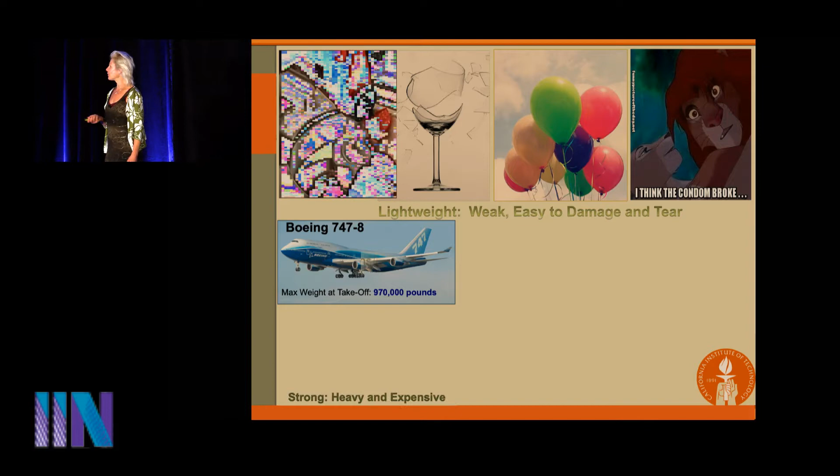So in contrast, let's look at the materials we know to trust. So some of us are very intimately familiar with these. Of course, the airplanes are made out of very tough, strong materials. Well, the Boeing 747 weighs nearly 1 million pounds. And the tremendous expenditures in the airline industry come from having to propel a 1 million-pound machine through the air. So if we do a very back-of-the-envelope calculation, my ticket to get here should have been $30,000. So thank you very much for reimbursing me.

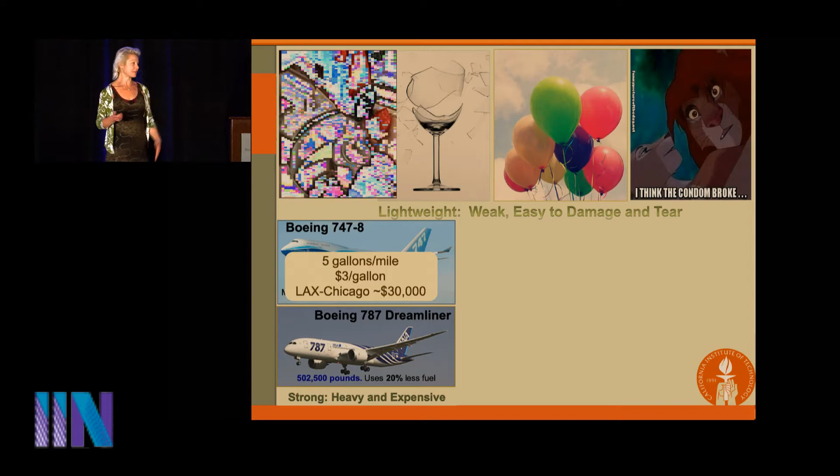Right, so of course the Dreamliner is already fixing these problems by reducing the weight. These are examples of materials that are very strong and tough, and because of that, they're heavy and expensive. Now, another example of this, of course, is the solar panel installation. We have a lot of these in California, certainly a lot of these in Europe. And these are specialized materials, so if this guy or any of these objects slide off the roof, this is going to be bad news for everyone. So another example of materials that are too heavy by the virtue of their functionality.

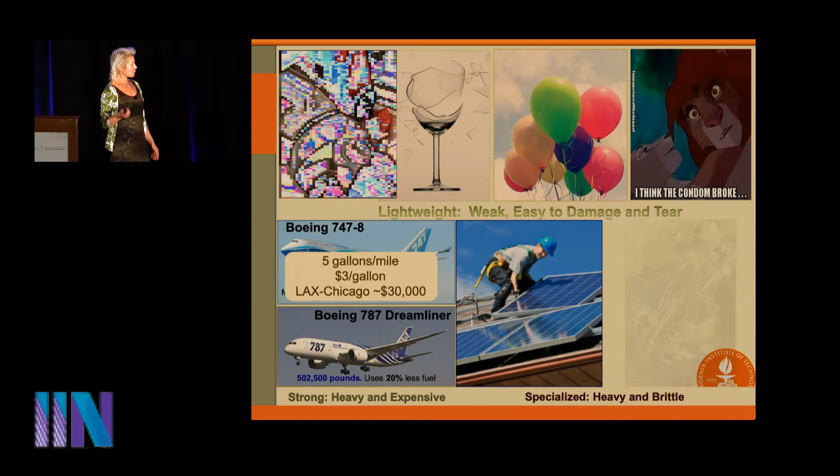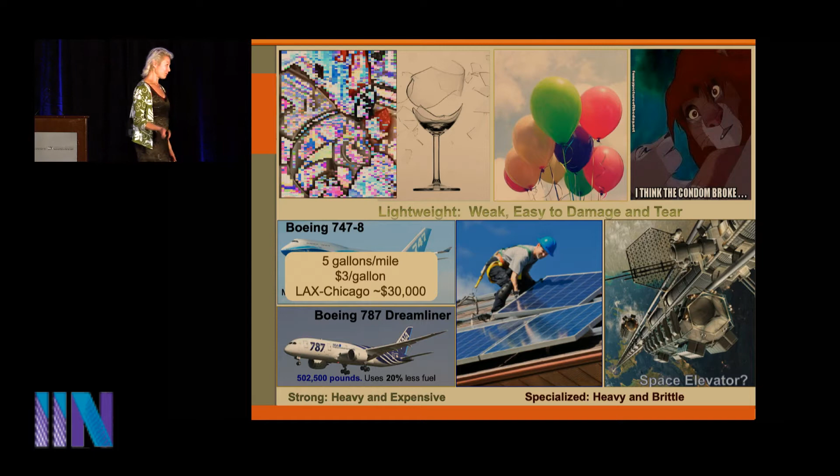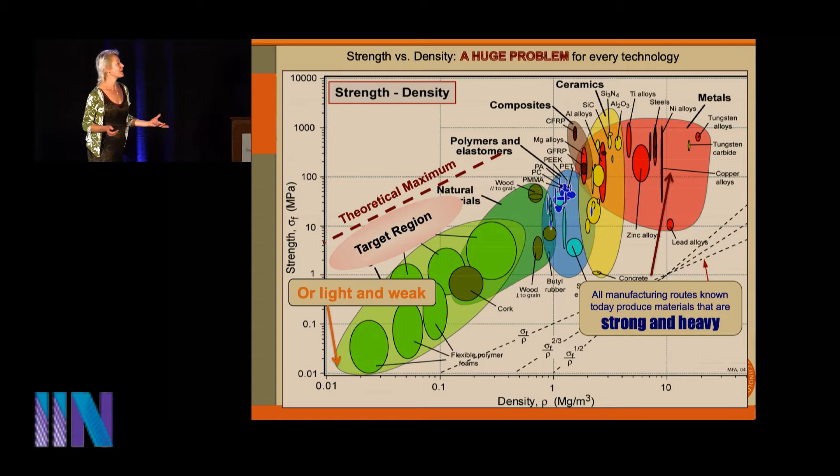So even a small increment within the space already represents a substantial change. So how do we do this? How do we hit this white target region if everything we know how to make today is already plotted here? So the way we do it is by introducing the concept of architecture into material design.

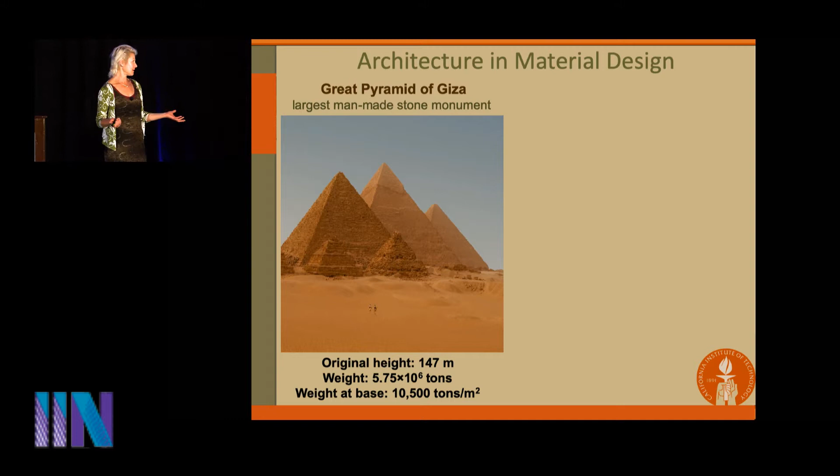So if you look at the Great Pyramid of Giza, this is the largest man-made monument. So it stands 150 meters tall and it weighs nearly 6 million tons. Now, in contrast to the Eiffel Tower, which stands twice as tall, and it uses 3 orders of magnitude less materials, so 1,000 times less.

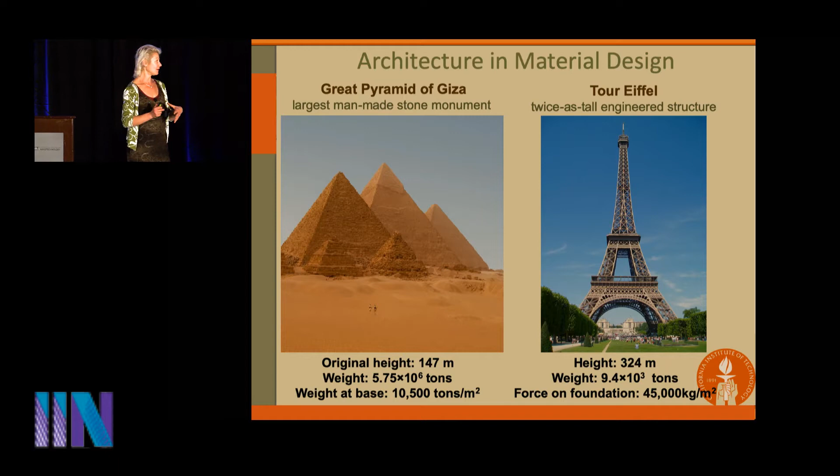So it's exceptionally lightweight. In fact, if I were to hold one of these in one hand and a feather in the other, and then to release them at the same time, the feather would fall down faster. These are very, very lightweight. Now, what we're after is not just the lightweight, but the simultaneous attainment of the lightweight and the strength. And for that, you have to go down to the nanoscale.

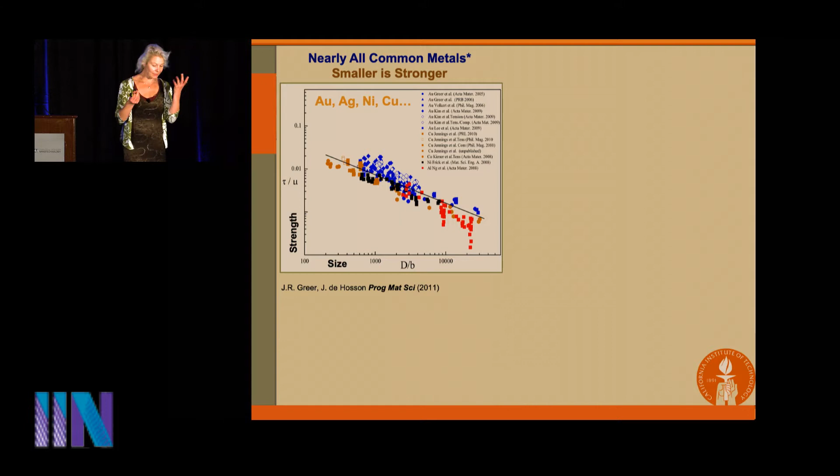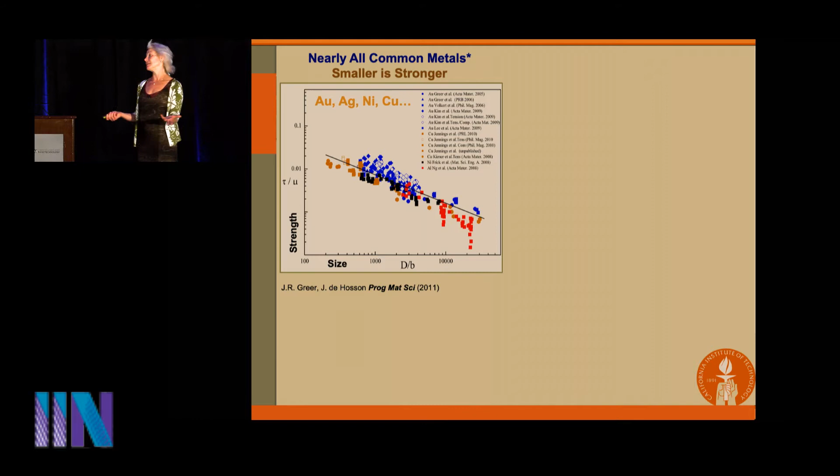What that means is that if you take a gold earring, we know them to be very malleable, and you reduce their dimensions to about 200 nanometers or so, the gold becomes as strong as steel. So smaller in this case is stronger. Now, take exactly the same metals and deposit them using different techniques, for example, sputtering or PECVD or all the nano deposition techniques that you are all familiar with. And all of a sudden, this effect is reversed. And now, smaller becomes weaker. This is a more modest size effect. It's not a log-log plot, but nevertheless, the smaller dimensions now give rise to weaker type materials.

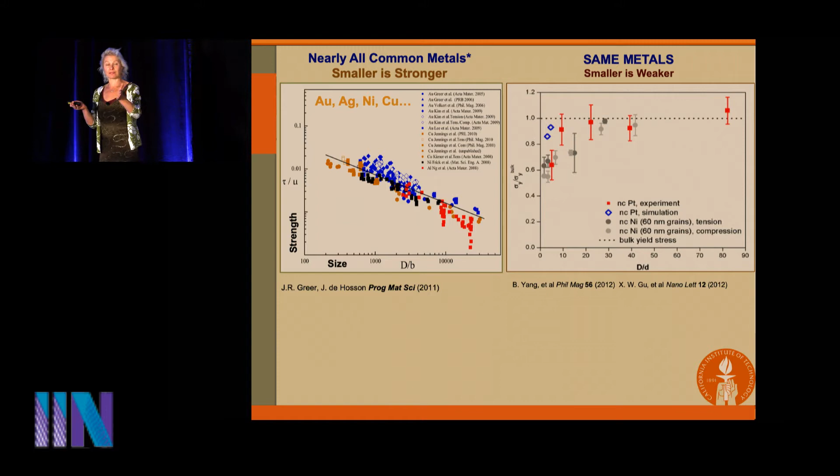So now you're starting to think, oh, it's the same metals. But now we have this tunability in strength by the virtue of size reduction in a different atomic level microstructure. Now, the size effect is even more powerful than that. If you look at a glass, so this is a glass rod. It's about 150 nanometers in diameter, and we're going to pull at it. Now, of course, we all know that's not possible. Nobody at room temperature is able to just pull on a glass rod and get anything useful out of this.

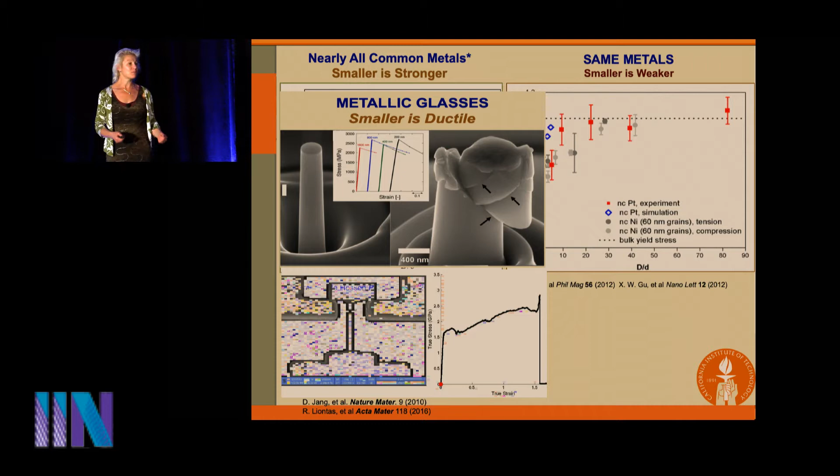So if you look at the stress strain data that we're collecting simultaneously, and especially if you focus on this region, you will see the formation of a neck prior to failure and an extendability of about 100%. So at the nanoscale, it turns out at room temperature, you can actually pull on a glass rod and it thinks that it's behaving like a metal.

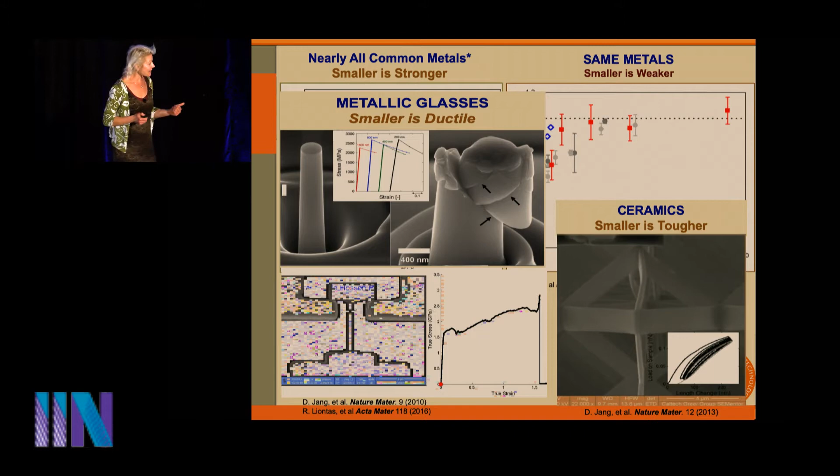Here's the last example. If you look at a ceramic nano architecture, this is just a single unit cell. So this is made out of titanium nitride, very, very brittle ceramic, and we're pushing on just a single unit cell. What you see is that these beams are deflecting, and they're deflecting so much so that the tensile stresses that are generated here exceed 1.5, 1.7 GPa. No ceramic should stay intact at 1.7 GPa of tensile stress. But this guy, not only is he staying intact, but he's doing this over multiple cycles.

So the takeaway message here is this: sometimes materials get stronger, sometimes they get weaker, sometimes you can suppress brittle failure, but all of these effects emerge only at the nanoscale. And so the question is, can we somehow harness these beneficial nano-size-induced phenomena and proliferate them onto the larger scales? And that's where the three-dimensional nano-architecting comes into play.

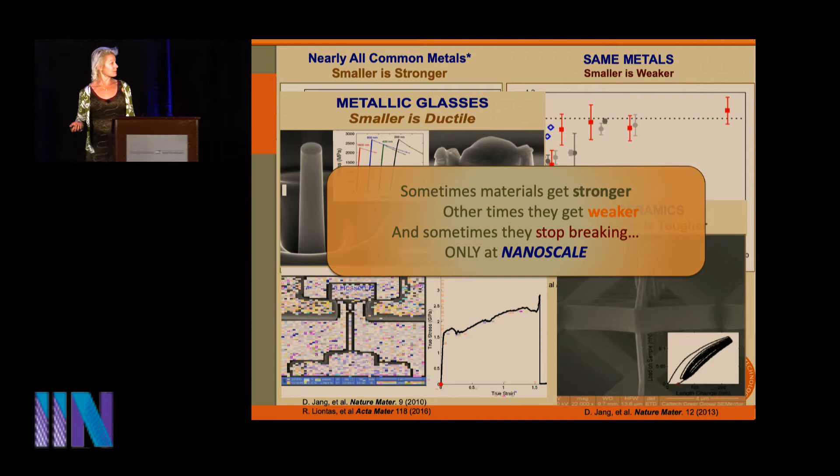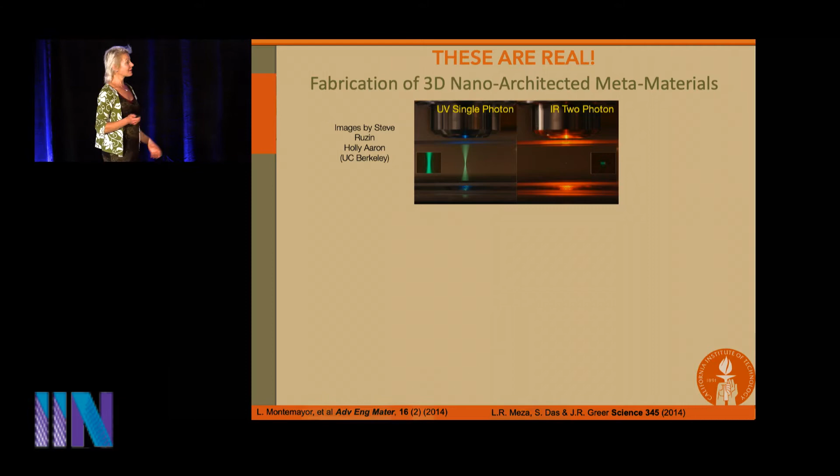So just a few words on how we create these very intricate geometries. Instead of using UV single photon lithography, which is a very typical process for two-dimensional lithography, two-dimensional architectures, we're using a process called two-photon lithography. And that allows us to concentrate all the light and all the exposure within the photosensitive resin in a single voxel. So it's the constructive interference of exactly two photons that gives rise to the sufficient amount of power to cross-link your polymer.

Now, as this voxel is rastered in three-dimensional space within the resin, it creates a pattern that we desire. There's no mask required. We're not limited to periodicity. I can write a nano version of each one of you, so nano chat is going to have a different meaning after we do this process. So we can create, I guess it's chat nano, sorry. So we create whatever scaffold we desire without using a mask.

And then what we end up with is this scaffold, but that's made out entirely of cross-linked acrylic resin. By the end of this talk, you'll see that that's not the case, but that's what most people do that use this technique. Now, we're not going to go build airplanes or anything useful out of these. So what we do after that is we often coat these scaffolds with the material we actually are interested in.

Now, how many of you are familiar with ALD, atomic layer deposition? Quite a few. So in the ALD community, they say, we can deposit anything you want for you as long as it's alumina. So here's some alumina. This is an example of depositing alumina. It doesn't have to be alumina. We certainly have used many other techniques, but this is how we started.

And then the form factors in which we typically make our samples are typically cubes, and so that allows us to expose 2 out of the 6 faces and then to etch out the scaffold that was so painstakingly written. So in the end, we end up with these hollow replicas of what we had originally designed, where the only dimension of a solid is that wall thickness of the ALD deposited alumina, for example.

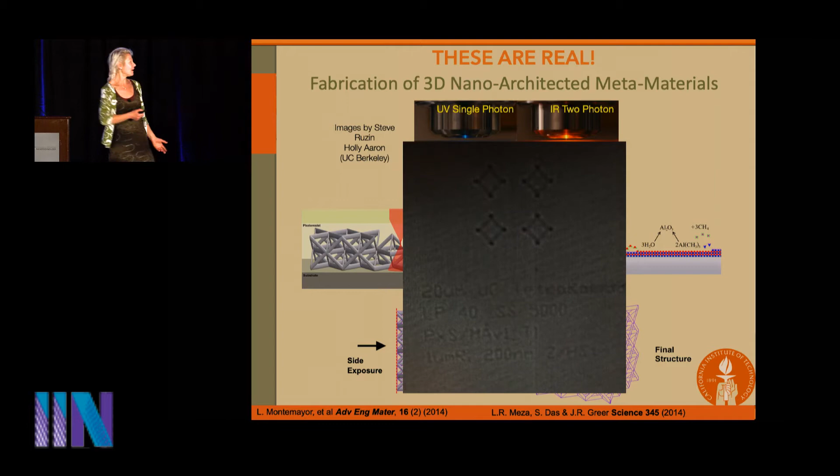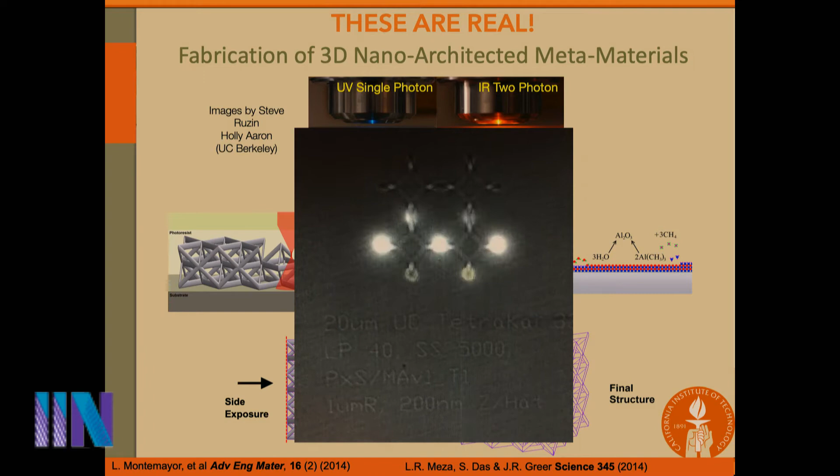So here's a movie in real time that shows you, is there a Nanoscribe here in the IIN? Do you have an instrument that has this? So maybe some of you are familiar with this instrument. So this is what it looks like in real time, this two-photon lithography process. You can see it resolving the architecture. It's not very slow, but it's also not very fast. So you can think of this in real time.

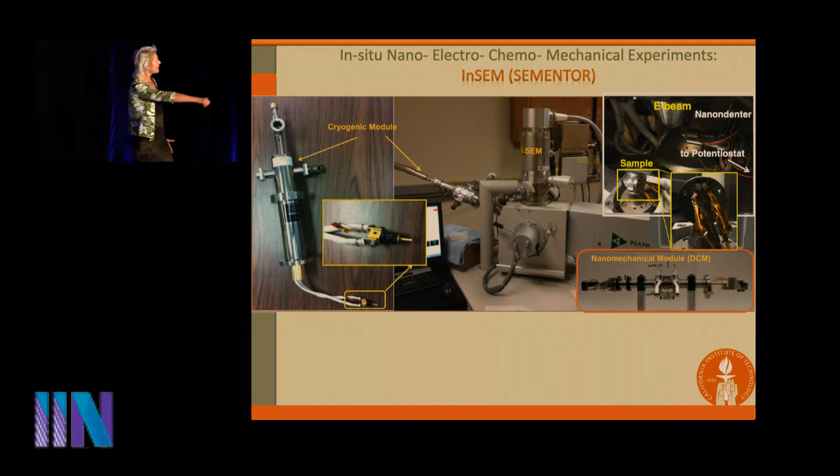Now, everything we make is pretty small, so you can't really resolve the features just by optical microscopy. So we built a special instrument that allows us to really perturb these structures and to study their behavior. So without all the bells and whistles, this would be just an SEM chamber. Of course, everyone's familiar with that. We also have the capability to do electrochemical measurements, and I'll share with you some of the results in that realm. Also a nanomechanical module. We're a very nanomechanically oriented lab. And then also a cryogenic module, which allows us to span the range of temperatures and study deformation at different temperatures. And these are the different acquisition devices.

So this was our hypothesis. Can we proliferate the size effect, right? So about 5 years ago, we did this experiment where we tried to probe this hypothesis. So we made a hollow octet truss. So this architecture is a hollow octet truss. The wall thickness here is 50 nanometers, so it's very, very thin. It's very porous, and it's made out entirely of ALD alumina, so very brittle material, right? So imagine your coffee mug with a severe case of osteoporosis.

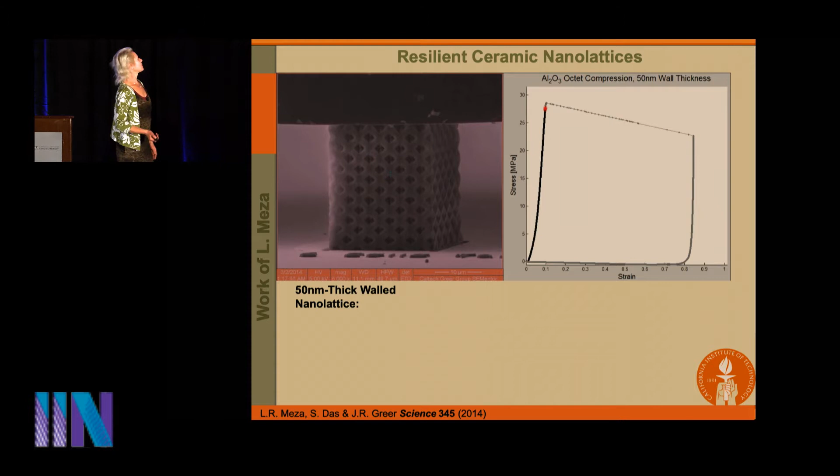And we're going to push on it, so of course it's very brittle, very breakable, so what do you think will happen? That's not a rhetorical question. What do you think will happen? It'll die, right? It'll crash and die, so let's see if that's what happens. So we're loading it elastically, just like we would expect, and then it crushes and dies, just like we expected. It's not even trying to recover. We have a little nanocemetery in our tool, and it's pretty much dead.

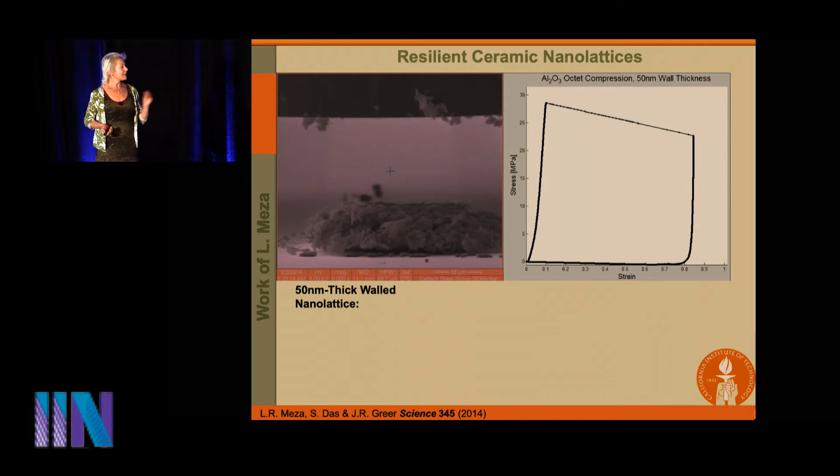There's only one good thing, and this is actually kind of important. If you look at the stress strain plot here, you can see that its strength exceeds 25 MPa. Something that's 99.9% air shouldn't have anything be measured in mega units. Shouldn't be mega anything. It could be kilopascals or pascals, but this is 25 MPa, so it remains strong. Now, all right, it remained strong, but it didn't do anything else interesting.

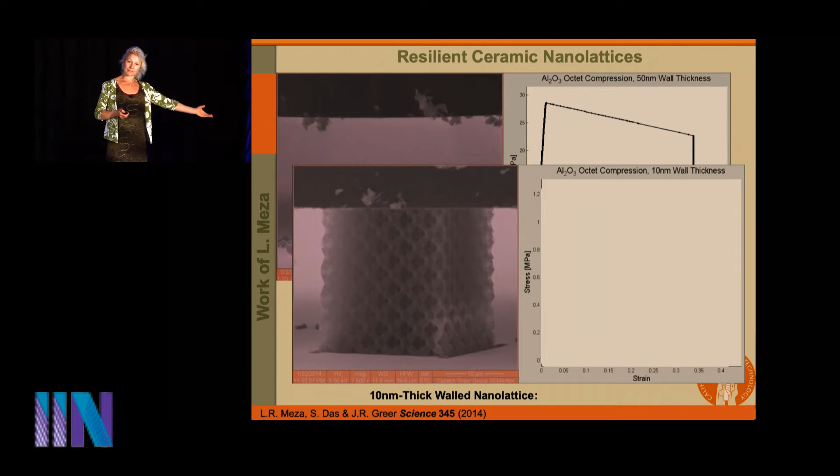So we repeat this experiment in the following way. We keep everything the same geometry, the same material, the same microstructure. The only thing that's different now is we're reducing the wall thickness by a factor of 5. So now instead of 50 nanometer walls, we're going to have 10 nanometer walls. Same alumina, very, very brittle, even more brittle now, right? So we're going to compress it. We should experience the same behavior. And so here we are.

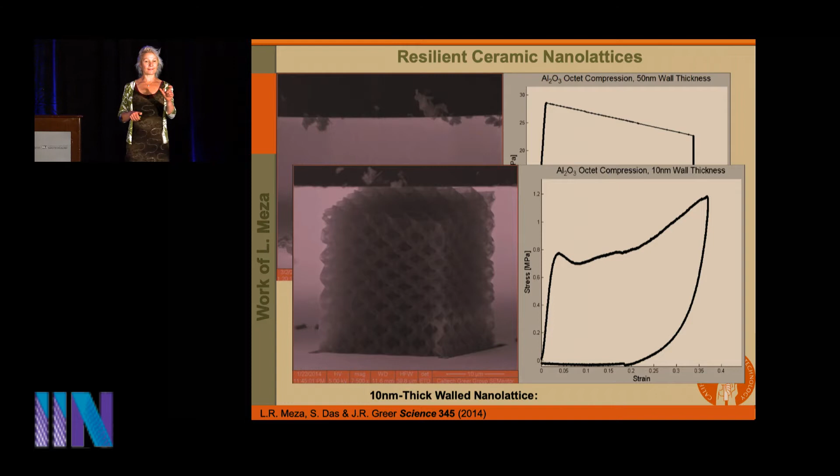So this is my former student, Lucas Meza, compressing this, and he's compressing it almost to 50%, and we're waiting for it to crush and to die and to fracture in every way. And this particular ceramic thinks it's a sponge. So if that doesn't convince you that there is in fact a size effect, I should just turn around and fly back to California right now. So the only difference is the wall thickness, but the deformation behavior is drastically different.

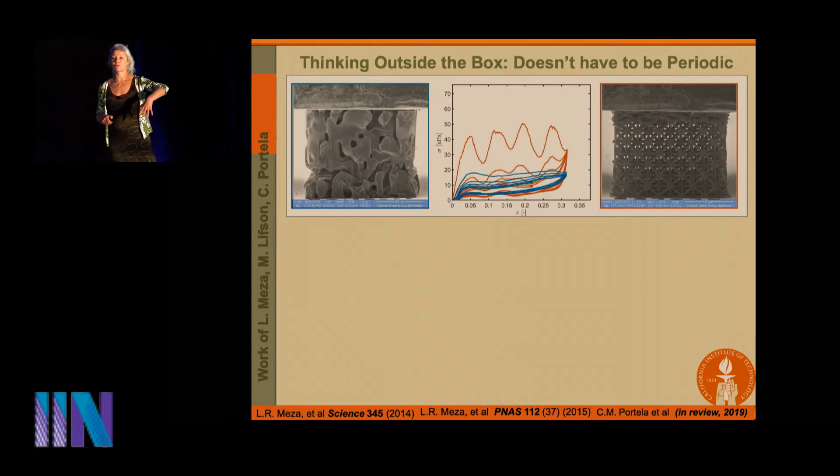So this is not the only example. We have since uncovered many more different realms of this behavior. What you're looking at is an aperiodic hollow alumina nanostructure. This is a nano labyrinthine, we call them, or bicontinuous surface nano-architecture. And you can see that they both recover and store and absorb energy exceptionally well over multiple cycles. So complex architectures, complex stress states, not periodic. You can see that the density doesn't have to be homogeneous.

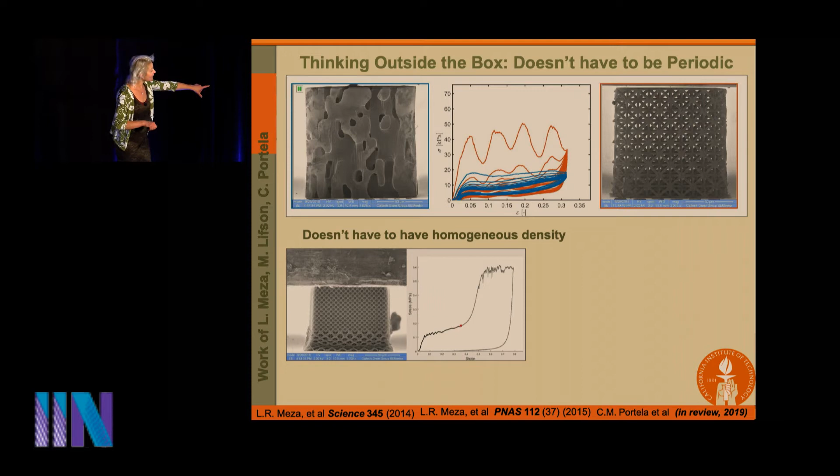And what I'm showing you here is a material that has two different density regimes. So this is, of course, lower density, higher density. And at this point of compression, this part of the sample doesn't even know that it's being compressed. So you can pre-build trajectories of deformation and trajectories of how the stress and the strain is going to respond at different strain rates. So that gives you that flexibility.

So what's going on here? How do we explain this? Well, turns out the answer lies in mechanics, as our mechanics community likes to say. So these architectures are mainly comprised of beams, and not just beams, but hollow beams. And the phenomenon that would allow recovery after deformation in a hollow beam would be through elastic shell buckling. So think of your soda can, effectively, right? So, all right, well, we can come up with a criterion then for buckling.

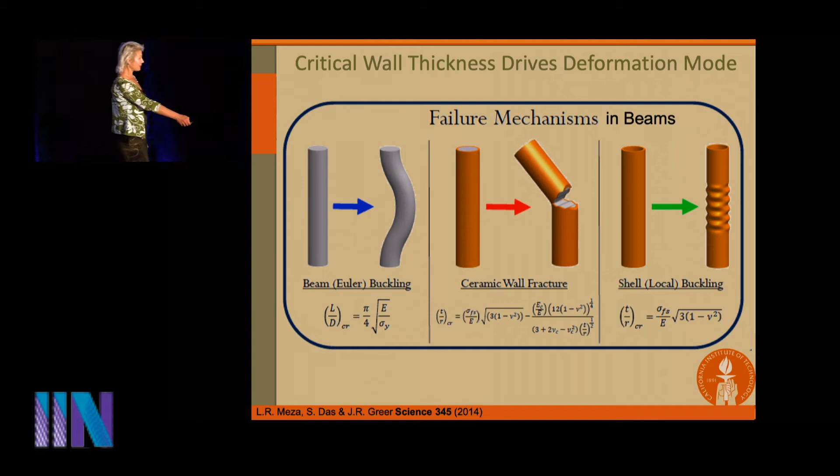So if you look at an individual beam whose radius, for example, is R and the wall thickness is T, there's a ratio. There's a T over R ratio, basically how thin-walled is this cylinder, which can be compared to the fracture strength of your material, so failure strength when this alumina would fracture. And it turns out that for this particular material, the critical ratio is 0.03.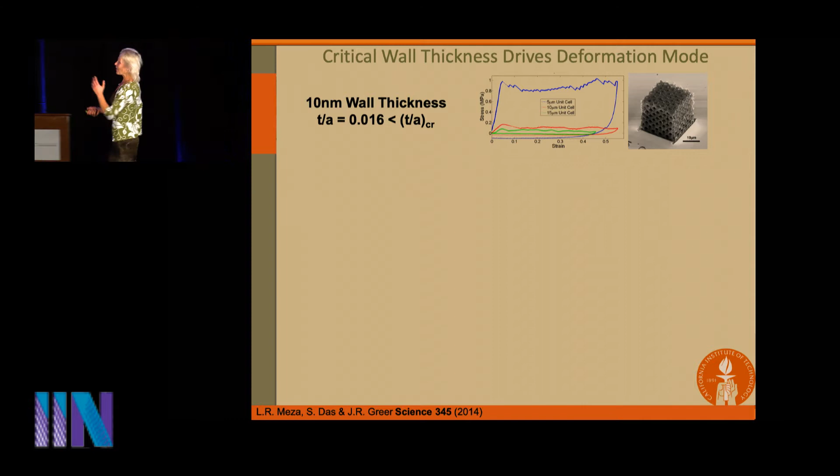So what that means is that for geometries that are below this ratio, we should be able to observe the shell buckling. For the geometries where it's higher than that, it would fracture before. So let's see if that's what happens. So for the 10 nanometer wall thickness, that's the sample that you saw recover, you can see that no matter what the unit cell size is, every time it recovers. This is an image of one of these samples after the deformation, which you would never be able to tell the difference because it looks the same. And of course, this seems to be checking out.

So now, as we increase the wall thickness, you can see the deformation is becoming much more jerky, much more drastic, much more discrete. And then this last one doesn't even try to recover at all. So it turns out that the answer lies in mechanics. So T over A is scale-free, right?

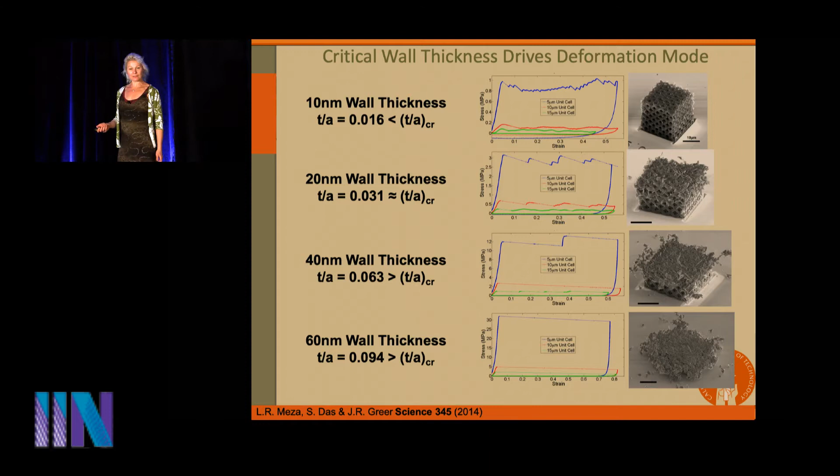And so what that means is that if we were to build a building that's comprised of giant concrete tubes whose wall thickness is 10 centimeters and whose radius is 3 meters, and the whole thing is 3 kilometers by 3 kilometers by 3 kilometers, I'm sure there's a building like this in Singapore somewhere, and a big giant comes and steps on it, it'll snap right back, just like our nanolattices did, right?

Okay, I hope that was a sarcastic right. Thank you for that.

Of course not, this would never happen. But why not? Mechanics tells us that it should. So how does the size effect, the nano size effect, manifest itself here if the mechanics is right? So T over A is scale free. As long as the T over A is below 0.03, it should work. But this would never happen in a building like that. You're all absolutely right. Why not? Also not a rhetorical question. Any ideas? Those of you who know, please don't say anything.

So it turns out that the answer lies in defects. The probability of finding a flaw in something that's 10 centimeters thick is 100%. Not just one flaw, but millions of flaws. Any little micro-inclusion, any little void, any little pore. And then the local stresses at those defects will far exceed the globally applied stress. And so, of course, the material will always fracture before your structures ever get a chance to shell buckle.

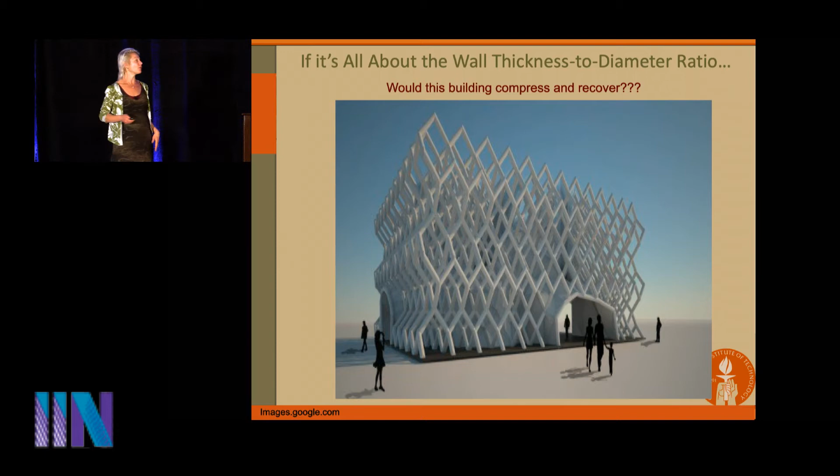So this would never happen with such large dimensions because of our ability to make much more perfect materials when their dimensions are reduced to the nanoscale. So the size effect manifests itself here in our ability to make much higher quality materials. If we were to make an architecture that would fill up this entire room where the wall thickness is only 10 nanometers, that would be a much higher quality material than if we were to occupy the same volume with a bulk material of the same chemical composition. So that's the nano size effect, right? So the right answer is no.

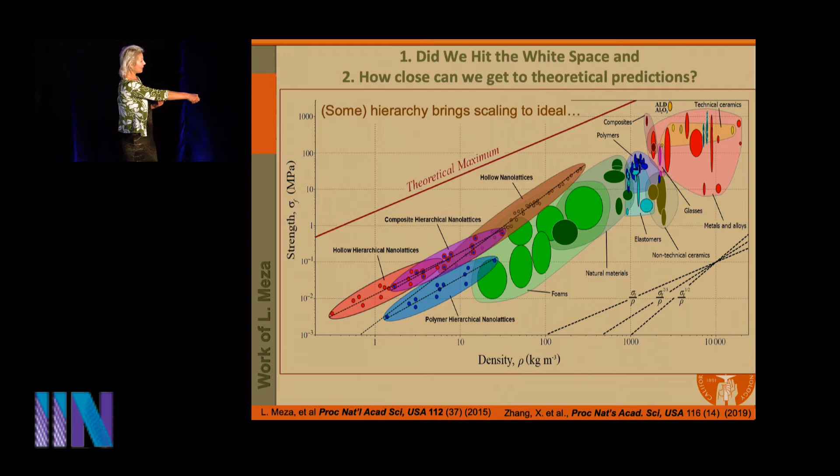All right, so now at this point, our questions were originally, did we hit the white space and how close can we get to theory? So just to remind you, this was the parameter space before, and then these are all of our points that we've accumulated over the last few years just on the hollow alumina. And you can see that we already bought ourselves a 2 orders of magnitude reduction in relative density in the white space where people hadn't really been before. We can do better than that now. So this was sort of the first venturing out into the white space. Now we can do much better than this.

So here's an example of carbon; we just published this work very recently. You can see that at higher densities, the carbon actually does in fact approach the theoretical limit. We also kind of had to revisit this theoretical limit. What exactly is the theoretical limit when you're talking about materials that are practically all surface? And those of you who work on 2D materials certainly know that effect very well.

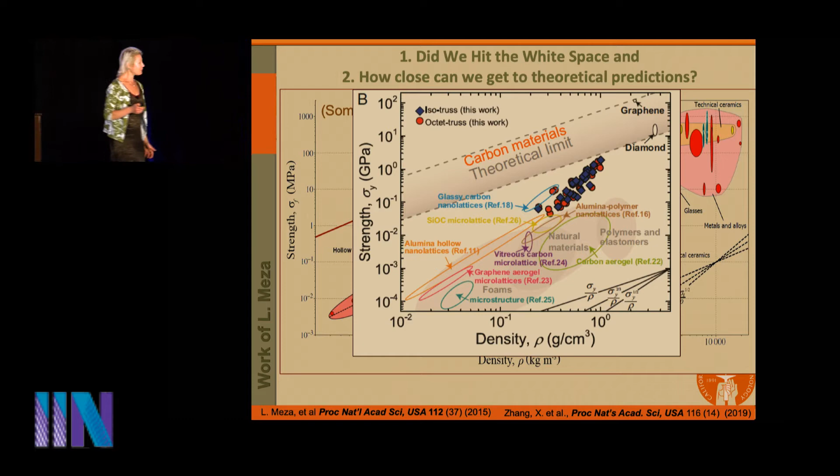Right, so we are now at a point where we can create entirely new classes of materials with unique, unprecedented properties. So that gave us a rush of many more questions. So what is the effect of architecture on the mechanical performance? What's the role of defects? How do they behave under tensile loading and under fracture experiments? Can we optimize them? And then I put down second and third harmonics of these questions. Of course, there are many more; the questions themselves are hierarchical, building upon this.

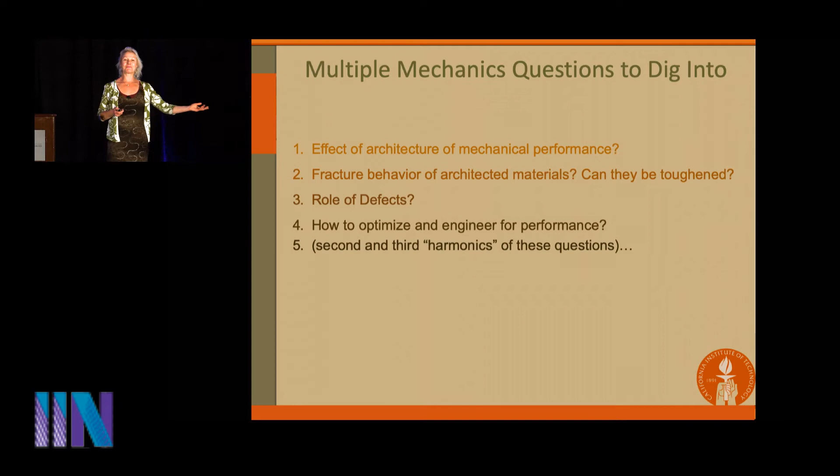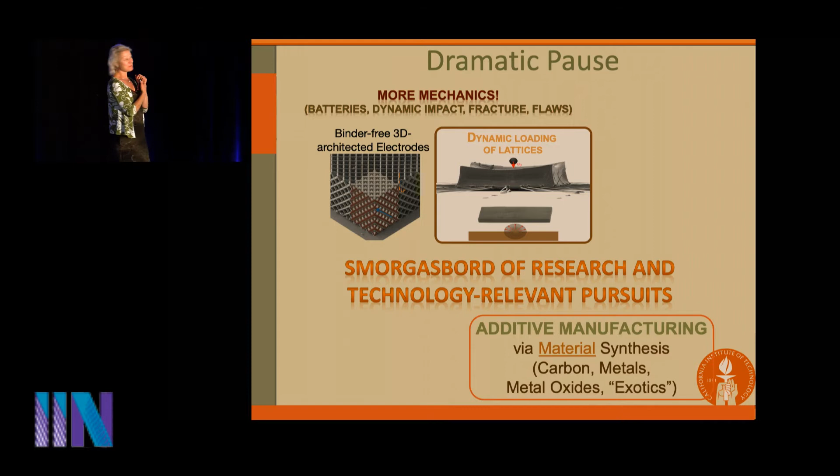But this is the time in the talk where we take a dramatic pause because I can't tell you about all of these things. So everyone takes a big breath. And I'm going to tell you about one of these things, and you get to vote. So I can either tell you a lot more about mechanics, I can tell you about biological materials like bone, I can tell you about fracture, I can tell you about mechanics and batteries, and many more, and dynamic loading, so shooting bullet-like projectiles onto these. Or I can tell you a lot more about chemistry and about additive manufacturing and about how we don't have to be slaves to the photoresist that you would buy from Nanoscribe, and how you can actually additively manufacture many exotic materials and many non-exotic materials with very small dimensions. So please take a look at these two.

How much more time do I have? 20 more minutes, possibly? Yeah? Great. Awesome. All right, so I will tell you only one of these stories, and I'd like you to take a look and to take a vote. So everyone has to vote once and only once, and you can't abstain. All right, so who wants to hear more about mechanics? Wow, both of you. Okay, great. Who wants to hear about additive manufacturing? Okay, a lot more. All right, so I'll tell you the story about additive manufacturing, and if anyone would like to talk about mechanics later, I'll be around for the whole day.

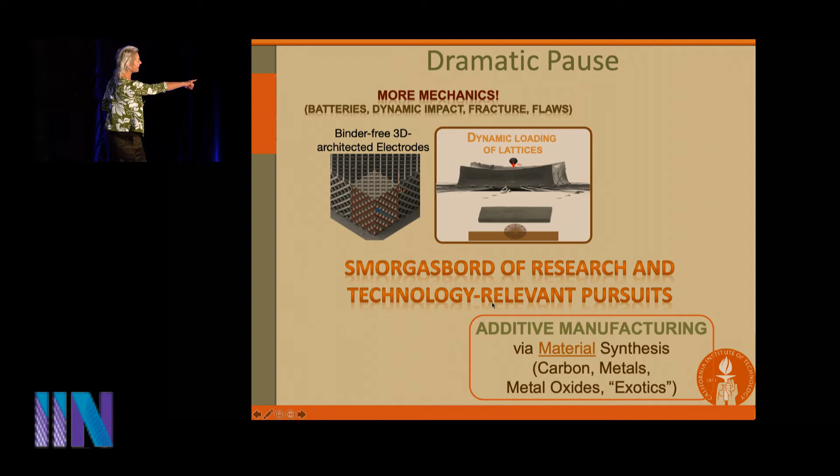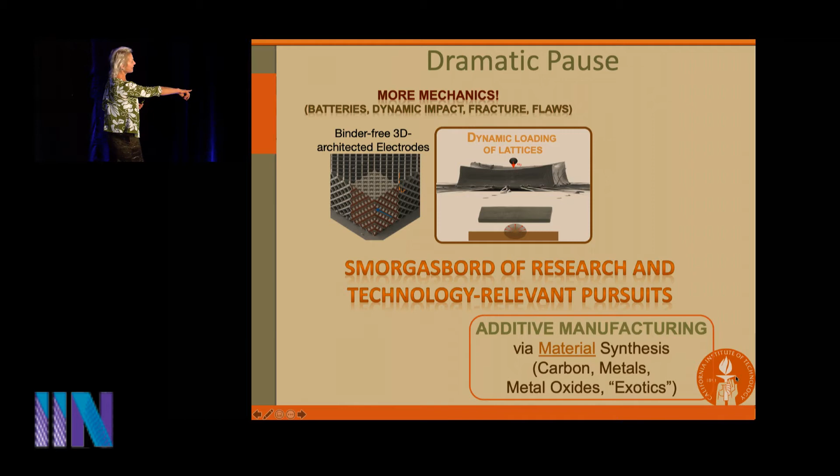All right, can you help me click basically on that little orange square, a rectangle? Can you just click on it, please? No. Yeah, if you just click right on that. No, on the orange. No, on the orange square. Yeah, nope, square. A rectangle. The rectangle, it's a geometrical shape. Right, okay. Can you just put it on the orange rectangle? Right here. This is an orange border, anywhere on this orange border, and just click. Yeah, click. Thank you. All right. Okay, thank you.

All right, so we did not want to only practice our two-photon lithography 3D sculpting using IP-Dip and IP-S, which are the two commercially available resists. And so a couple of years ago, my student looked at these resists and he said, well, I want to try to make something else. In fact, I'm very interested in additive manufacturing of metals. So this is where we begin our additive manufacturing story.

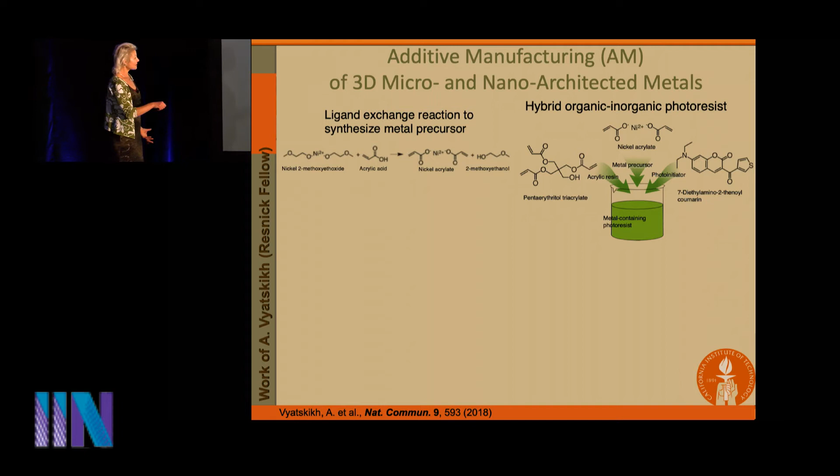He looked into a ligand exchange reaction. And what we mean by that is that if you have a metal ion that is trapped inside of an organic shell, you can actually mix it with acrylic acid and then interchange it for the acrylate groups, which then become amenable to photoinitiatable types of reactions. So when we mix these organic and inorganic parts, the acrylic resin for cross-linking, this nickel acrylate, as well as a photoinitiator, this creates a resin that could be amenable to light.

And so at the time, we didn't know if it was going to work, and we got extremely lucky because it did. So what you see is that this is the nickel-containing resin. So look at the unit cell size here. It's about 10 microns. And the beams here are roughly 2 microns or so. So this is a metallo-organic compound. Now, how do we get rid of the organics if what we're really interested in is nickel?

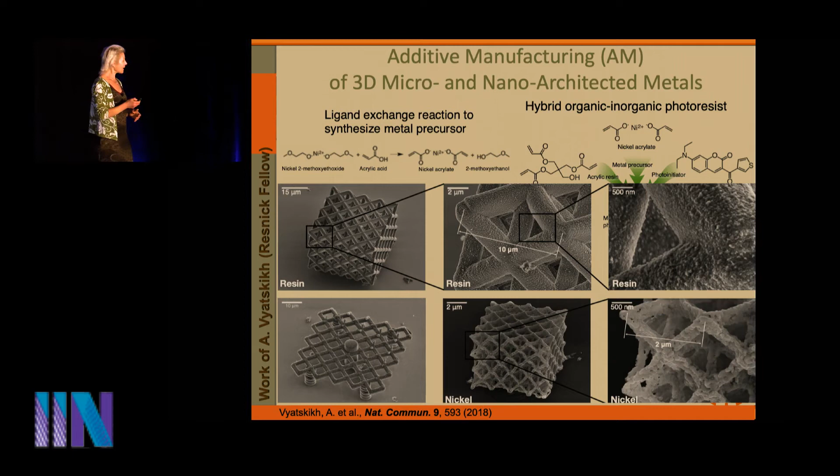Well, you burn them. So what we did is we pyrolyzed this structure, which is a fancy word for burning without oxygen. And when that happened, of course, all of the organic material volatilized, and the concomitant shrinkage that came with this ended up allowing the final additively manufactured structures to be only 2 microns in terms of the unit cell size, while each individual beam here is about 400 nanometers. So my student Andre made these, and then the question, of course, was, well, how nickel is this nickel? You say it's nickel, but is it really nickel? It's all chemically derived, it's new.

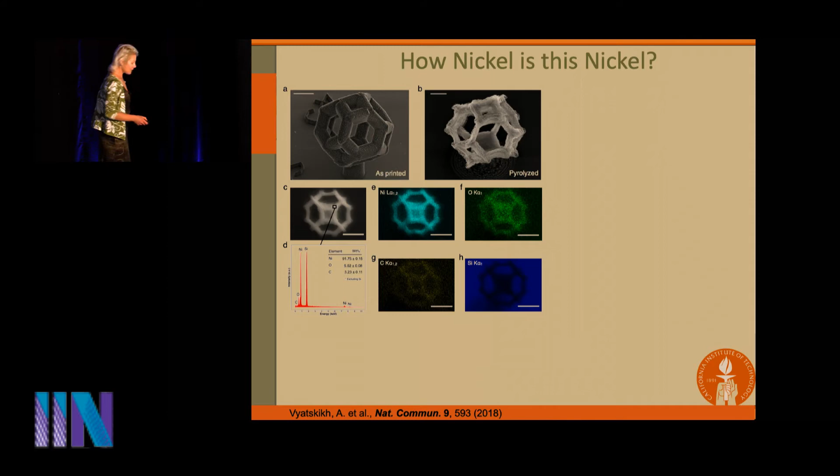So here's the as-printed resin, here's the resin after the pyrolysis, and what we're learning is that there's actually quite a bit of nickel. So this is the EDS spectrum, of course, that shows you that quite a bit of nickel, maybe a little bit of oxygen, but that's not really how we tell the chemical composition or the microstructure of materials. The way we do it in material science is we do TEM, transmission electron microscopy, that allows us to look at the atomic level composition.

Now, how many of you have used TEM before? So you know how challenging it is to prepare these samples, right? How do you convince an additively manufactured 400 nanometer beam to jump onto your TEM grid? It's not easy. So Andre was particularly ambitious and he said, well, I'm going to write a grid on top of a TEM grid, and I'm going to pyrolyze, and I'm just going to hope that one of these beams is going to subtend one of the holes. And sure enough, we got very lucky.

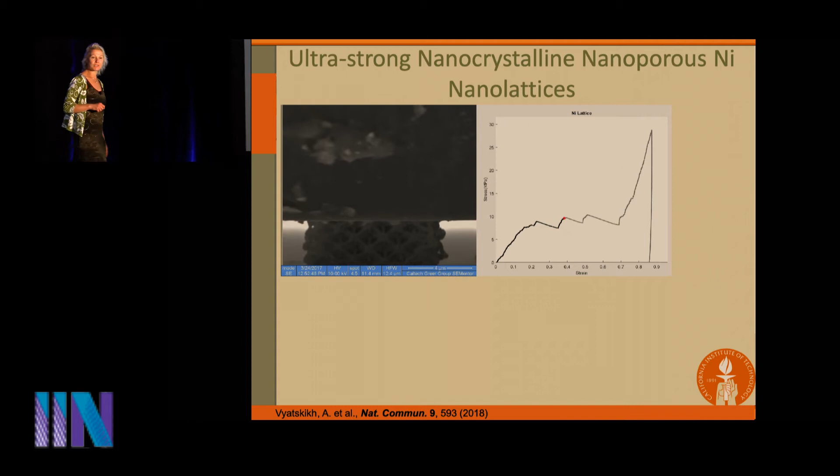So here's our nano-architected nickel, entirely made out of nickel, nanoporous, additively manufactured. And so we're compressing it and we're looking at the strength. The porosity here is about 30%, so it's not super lightweight, but it's still nanoporous. So we're looking at the stresses here. Well, they're about 15 MPa, and then once we've fully densified it, of course, it shoots up. So it deforms just like we would expect it to deform.

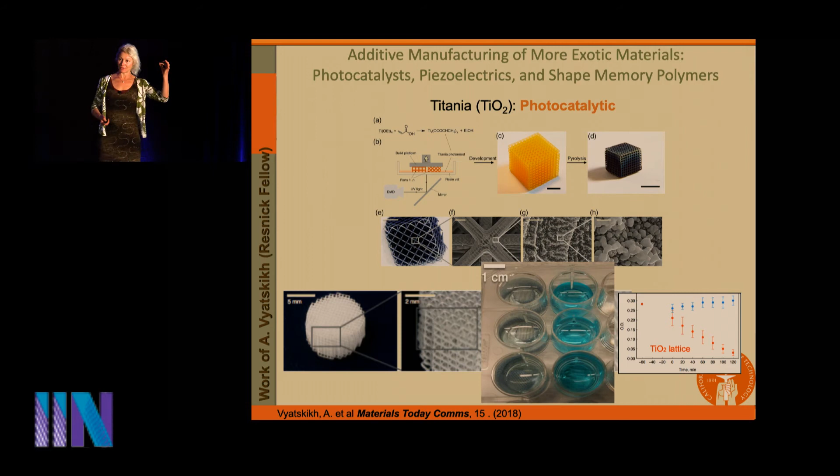And the advantage here is that the titania scaffold is not in the form factor of nanoparticles, which you can't extract out of the water. This you can just lift out of your bottle, so you don't have to drink the titania as well. So here's one example. Now, titania also has nanophotonic properties.

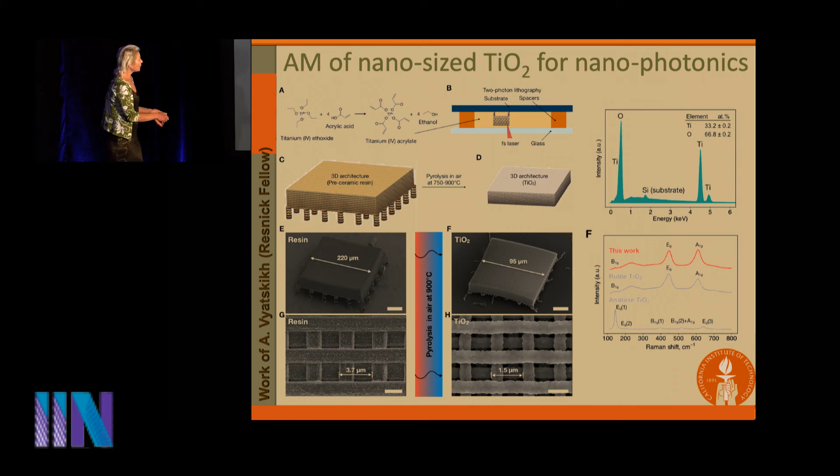So when you reduce the dimensions of these titania nanoarchitectures, here's the very bulky monomer that ends up here. Once you use 2-photon lithography to create these at the smaller scale, you can see the resolution here is only 1.5 microns. So we're reducing it back down to the nanoscale. You can see the emergence of a photonic band gap in the IR, and this band gap is shifting as a function of the periodicity of these structures. Titania, of course, is a high index material, so you can do quite a bit in nanophotonics using these additively manufactured materials.

And also, we were delighted to finally perfect the shape integrity. This took some time, but you can see that these titania beams' shape integrity is much better than when we first started with nickel. So there's certainly many ways to improve these types of devices.

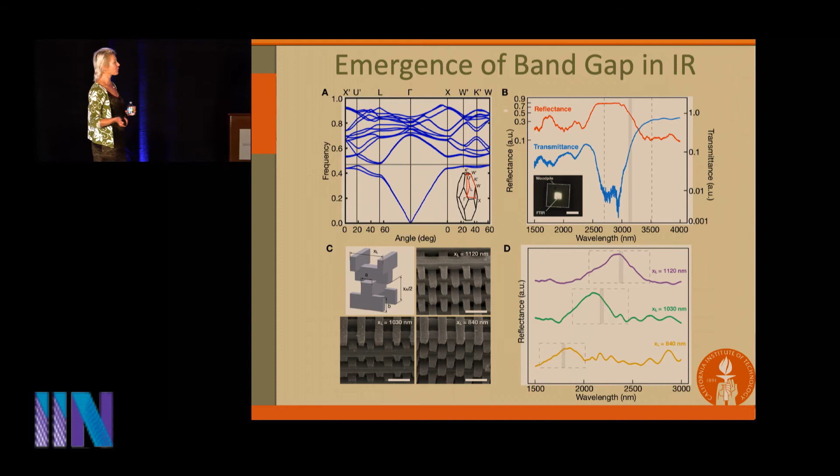Now, the metals and metal oxides using the ligand exchange reaction are interesting, but they're still acrylate based. So if you wanted to go to a more benign, more green chemistry, it would be great to shift our efforts towards hydrogels and aqueous type syntheses, where we don't have to use acrylate based chemistries. This is the work of my student Daryl, who took a bold step in the direction of hydrogels. What Daryl noticed is that if you take a metal salt, here zinc nitrate,

you can use this metal salt based synthesis to do a swell-in type of reaction, then cross-linking and trapping the metal ions inside of this hydrogel network. And then it's no longer called pyrolysis. When you burn things with oxygen, it's called calcination. I'm learning all sorts of chemical things here. So when you calcinate this in air, what we end up with is a zinc oxide architecture using aqueous only synthesis, no acrylates here.

So again, trying to understand the nature and chemical composition of these zinc oxide structures, it looks like we did in fact make zinc oxide using this hydrogel-based synthesis. This was an entirely new adventure. We didn't know if this was going to work. Sure enough, it did. And what we're learning is that it's very nanocrystalline, even more than the nickel. In fact, the mean grain size here is only 5 nanometers. So what is the one property of zinc oxide that all material scientists know about?

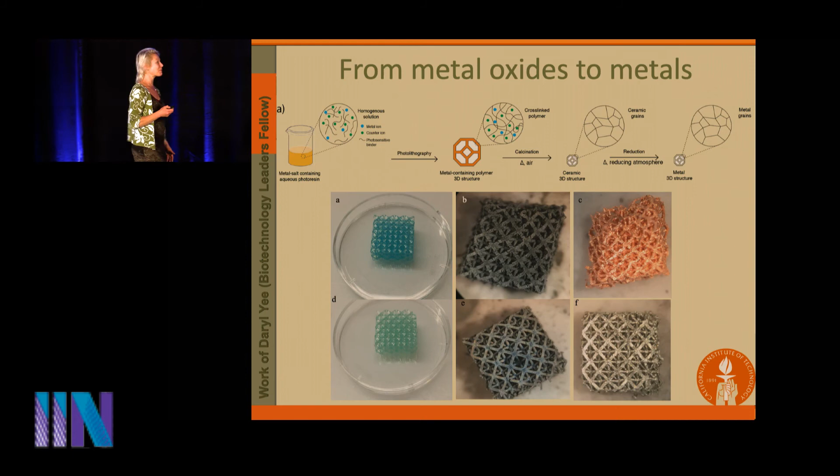Now, I think that this person is trying to tell me that it's my time to finish things up.

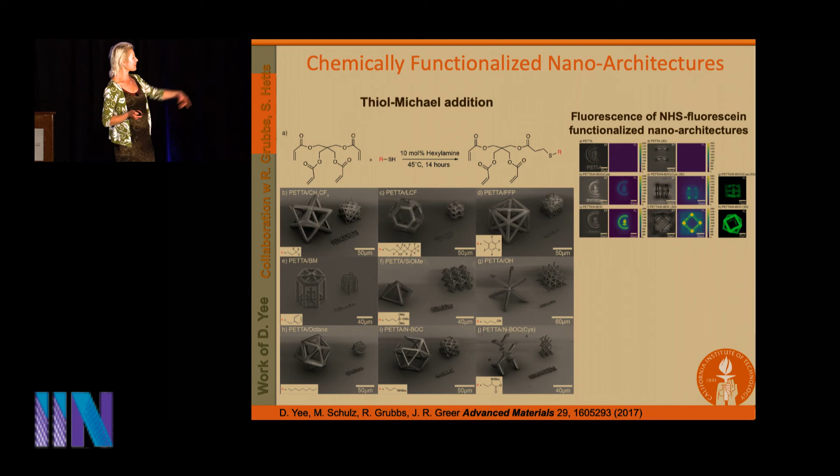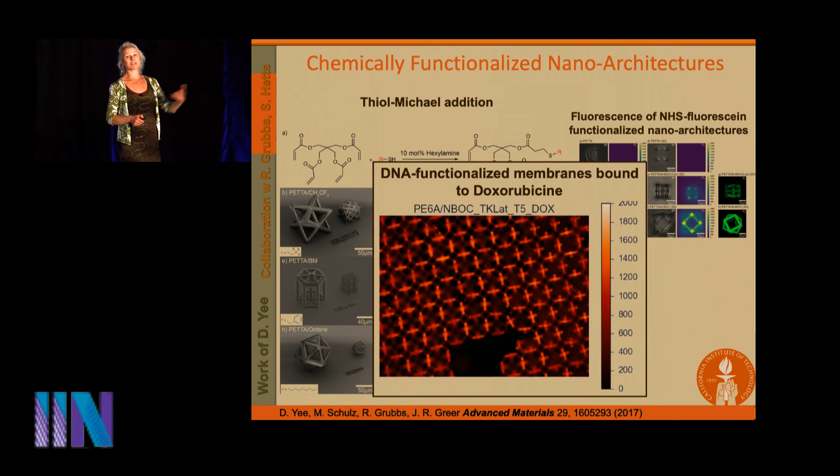So we also work with Nobel laureates at Caltech quite a bit. So this was our first paper with Bob Grubbs that shows that you can also functionalize the surfaces of these structures, for example, with DNA, and then DNA can bind onto various chemotherapy agents, for example, like doxorubicin, so you can capture various chemical functionalities and make membranes out of them. Very recently, we started playing with shape memory polymers, so you could start building different chains and program your structures using the glass transition method, for example.

And so what I'm showing, this is the work of my student, Luizetta. This is all new work that shows you that you can program the cycle. You can program them at hot temperatures and then lock the shape, and then reduce the temperature, and it'll retain that shape like the flower is doing here. And only when you increase the temperature back up and heat them back up will they go back to their

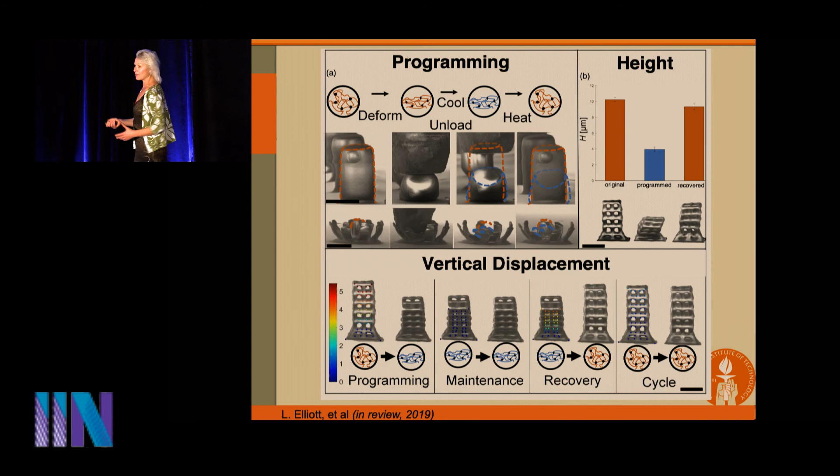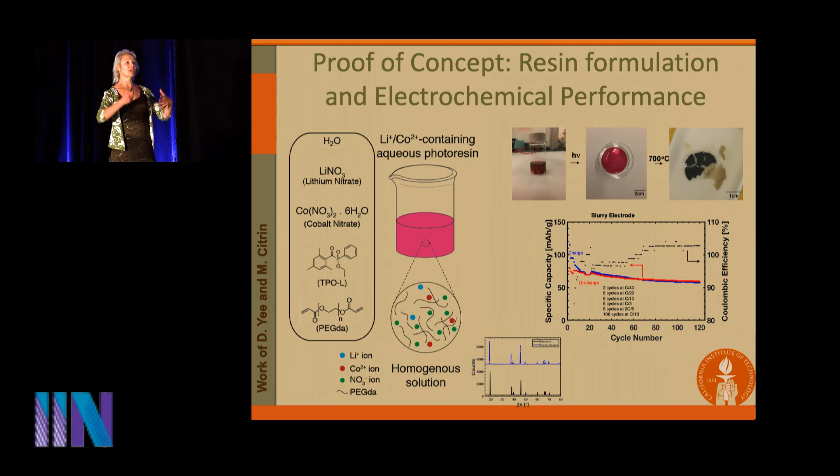original shape. So you can imagine shape memory effect being used in stents or in very, very small, these are very tiny architecture, so you can imagine using them in the eye, for example, or somewhere where the vessels are very small. Just a few words on making lithium cobalt oxides. So this is very relevant for battery materials. So looking towards all solid state batteries, we can now use these synthesis routes to produce lithium cobalt oxide in different shapes. And I think I want to finish with this little story.

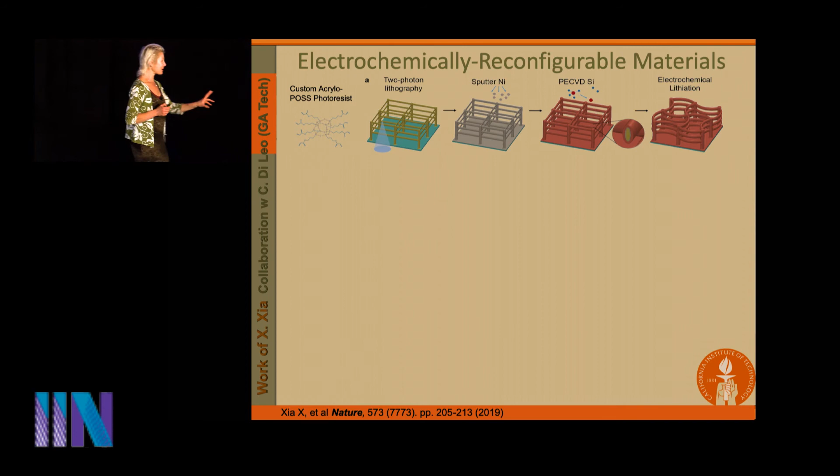Can I possibly have 2 more minutes? 1 more minute. Oh, yes, I can. 2 more minutes. Great.

Okay, so I, as a human being, I'm actually very interested in defects. Like I just really like defects and studying defects and the effect of defects on various material phenomena. So I mentioned this battery, the lithium cobalt oxide. So I have a few students who are interested in batteries, and this is one of them. So he decided to make a battery out of these. So this is a tetragonal microarchitecture.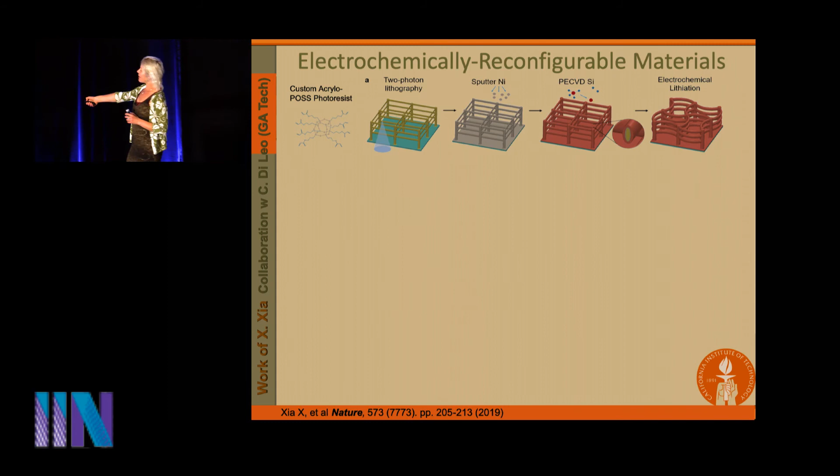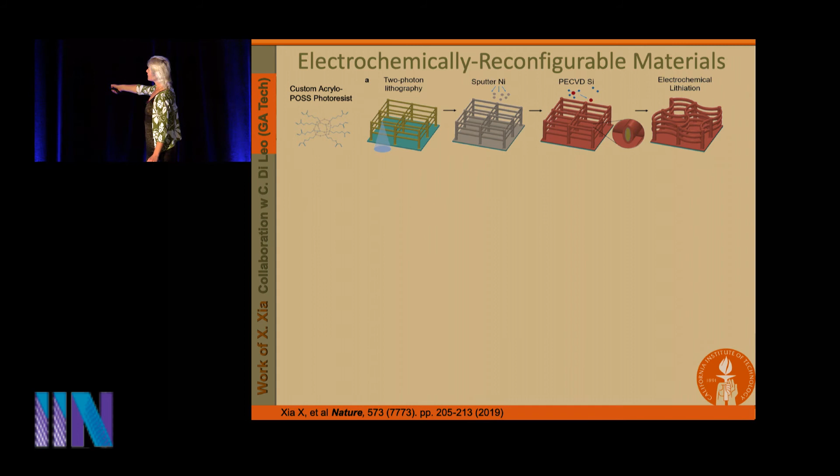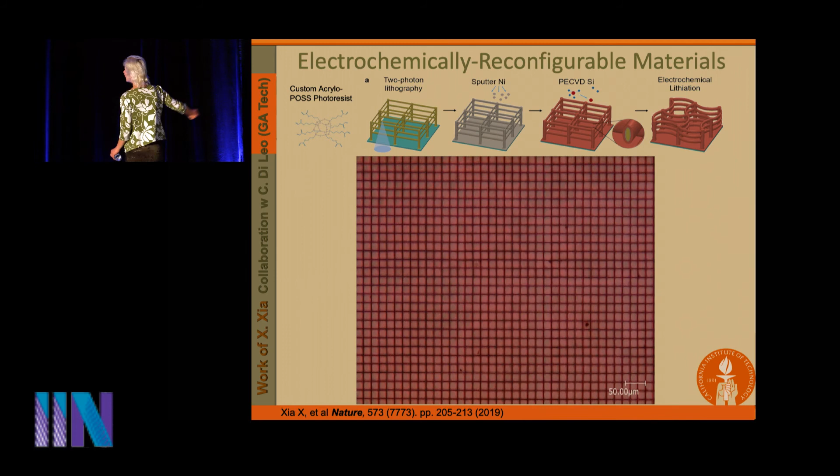And you can see that there are beams basically subtended over these unit cells of tetragonally shaped lattice. And the idea being is that once you lithiate it, they will buckle out of plane. And so here's one of these. This is a top view of one of these lattices as they're being lithiated. Yeah, as they're being lithiated, and you can see what ends up happening is that these are these sinusoidal type patterns that evolve. Actually, they look like violins. I'm a musician, so to me they look like violins. So you can see these sinusoidal patterns that are developing in response to lithiation.

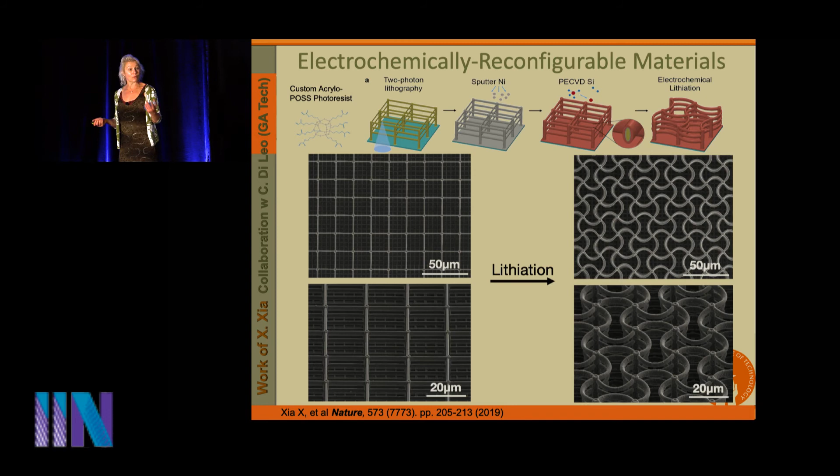So looking at these electrochemical properties, we realize that actually changing the rate at which we lithiate them gives rise to different domain formations. And so these are all SEM images. These are not computer simulated. These are actual SEM images of some of the different patterns that form. Well, why do these patterns form? Well, it turns out it's all about the defects.

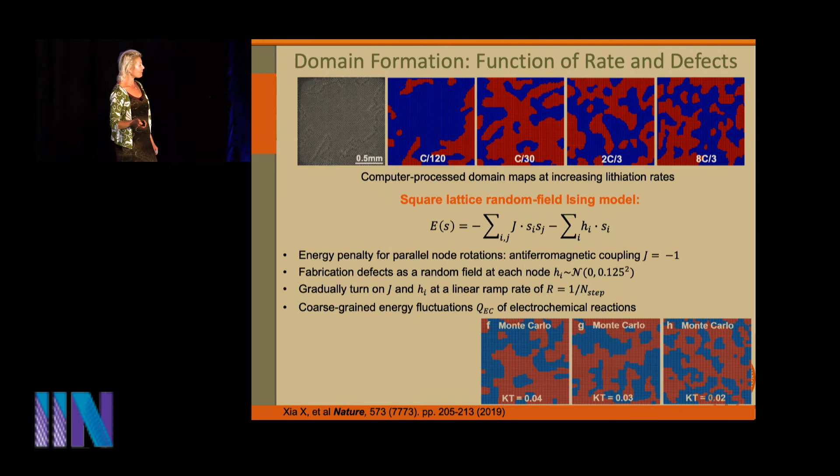And actually, we can use this antiferromagnetic type Ising model to describe the coupling of these domain formations within these networks. And so we were able to simulate, to put the theoretical framework over this. So these are the simulated patterns. These are the real images and simulated patterns. And it looks like there is, in fact, quite a bit of coupling going on between the randomly distributed defects in the structures and the defects that we can program in.

And so what we learned is that if you start with a silicon lattice and then you lithiate it, you form this intermetallic compound, and then you're forming this compound, you can calculate the phononic band gap, and then that can shift based on the periodicity that emerges from the different degrees of curvature in these beams. What we'll learn more is that we have quite a few degrees of freedom. We can induce rotation, bending, buckling, and expansion.

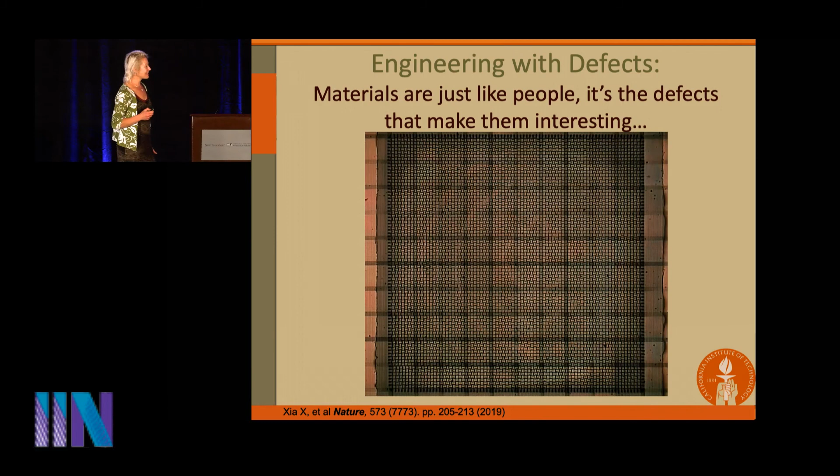And here's the best part. Once we understood how these defects affected things like band diagrams, we can tame them and we can program with them. And so here's one of these microlattices, and we now programmed a pattern into it. And watch what happens upon lithiation. You don't know what it is, but now that we're lithiating it, you can hopefully see the amazing resemblance between what we programmed and my little Caltech logo down at the bottom. So once we understood the defects, we can actually put them to use.

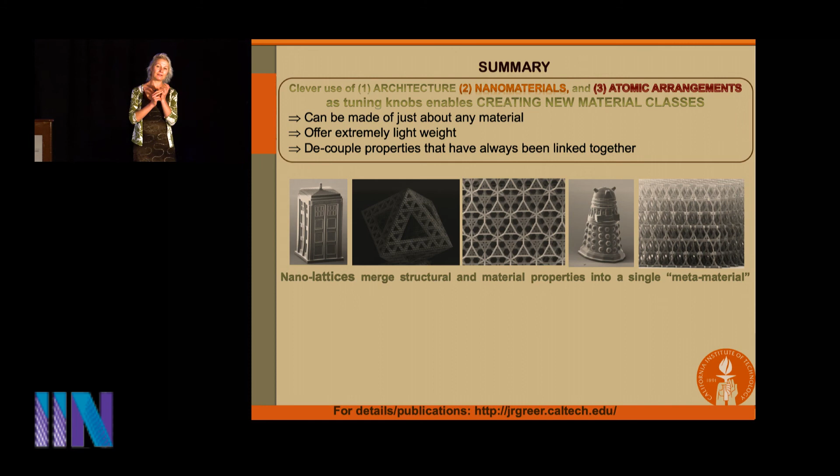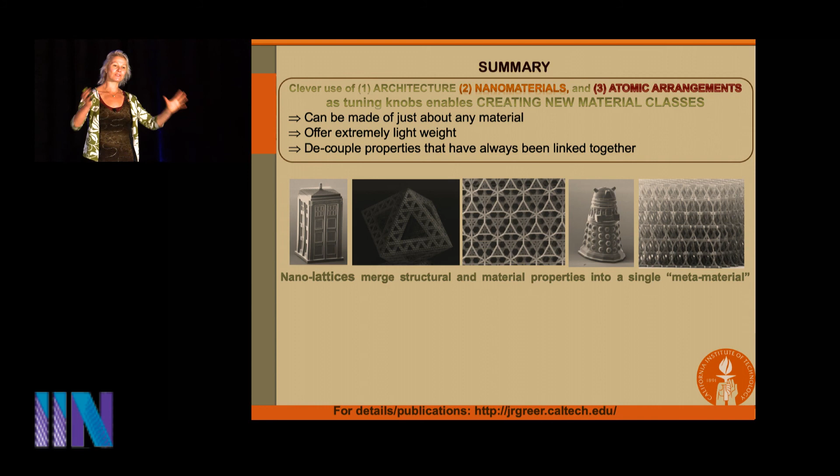And so if you walk out of here thinking, she showed all these videos and pictures and some things, and it's just a lot. So I'd like you to walk out of here with 3 key takeaways. If you're clever about your atomic level microstructure in the materials that you're interested in, the nano-induced size effect, how your material class responds to the reduction in size, and to the specific architecture that you're interested in, you can create entirely new classes of materials with not only unprecedented properties, but with unprecedented combinations of properties.

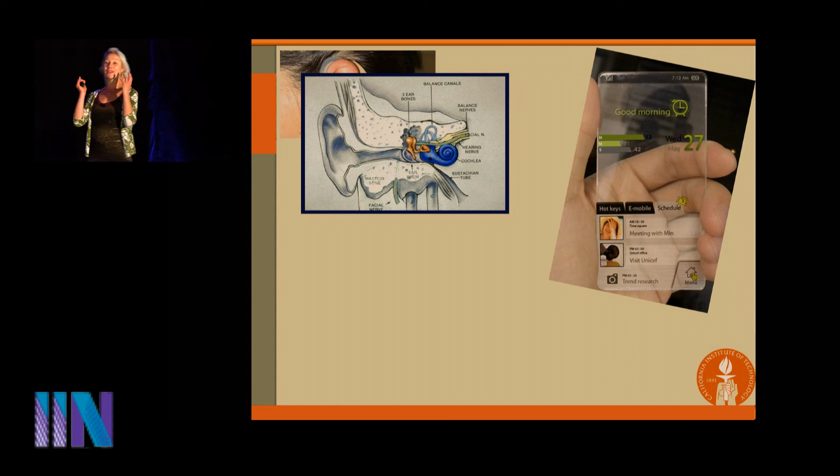And the reason why you would want to do that is so that our kids grow up in the world where there are no hearing aids, because we'll just be able to write the cochlea bone and insert it directly into your ear without any need for hearing aid, so that our iPhone 83 can hold its charge for a year without needing to be recharged every 24 hours or so.

The balloons, of course, will be helium-free because helium is a precious resource and these things are stiff. So as soon as we figure out how to make them not be porous, we'll be able to evacuate the air, and vacuum is lighter than air. Christmas ornaments, of course, would never ever shatter again.

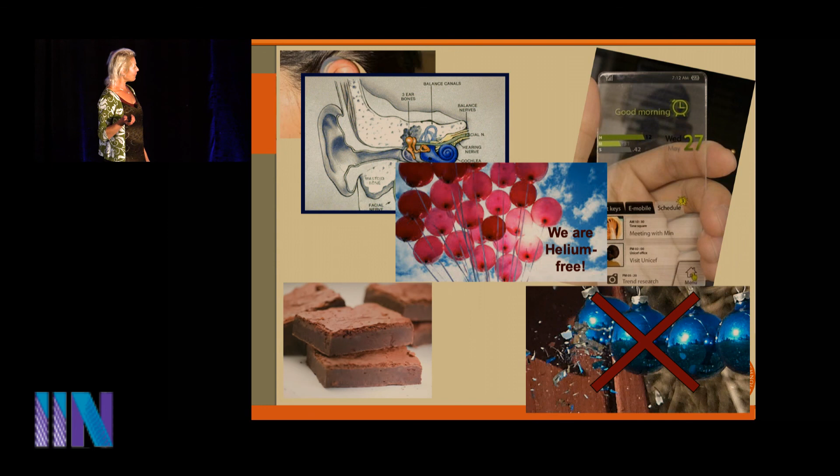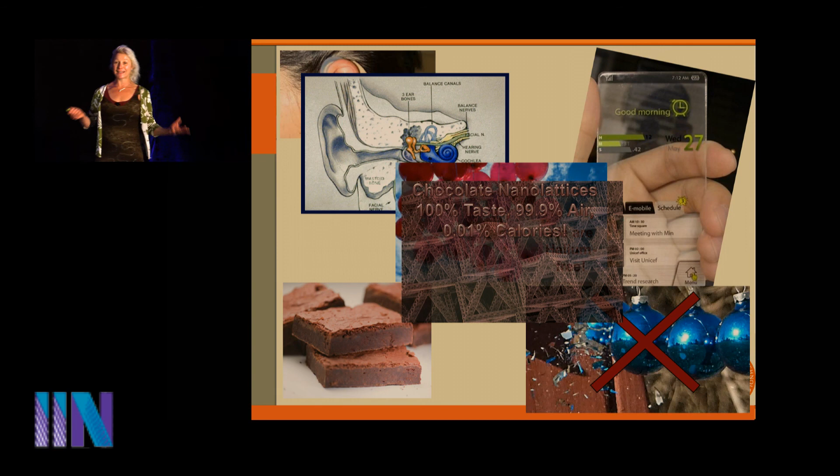And here's perhaps our most exciting pursuit. So I saw there's some desserts, I think, some breakfast materials out there. So brownies, right? So what we're working on nowadays is chocolate nano-lattices, which are 100% taste, 99.9% air, and 0.01% calories.